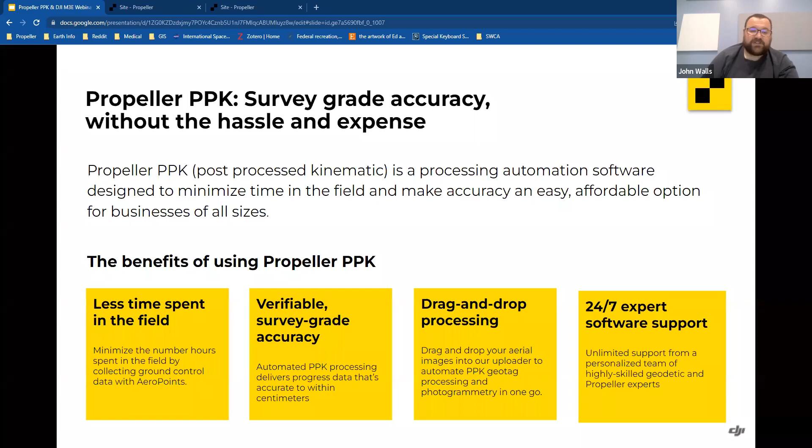So we've discussed at length the Propeller platform and how we help our customers, but really most of you did turn up to hear about the new UAV from DJI. So the Mavic 3 Enterprise is the latest survey-grade drone that Propeller is proud to partner with DJI on to deliver that PPK drone surveying solution. This drone is perfect for smaller earth-moving projects all the way up to a couple hundred acres due to the increased efficiency in the battery life and updated camera settings.

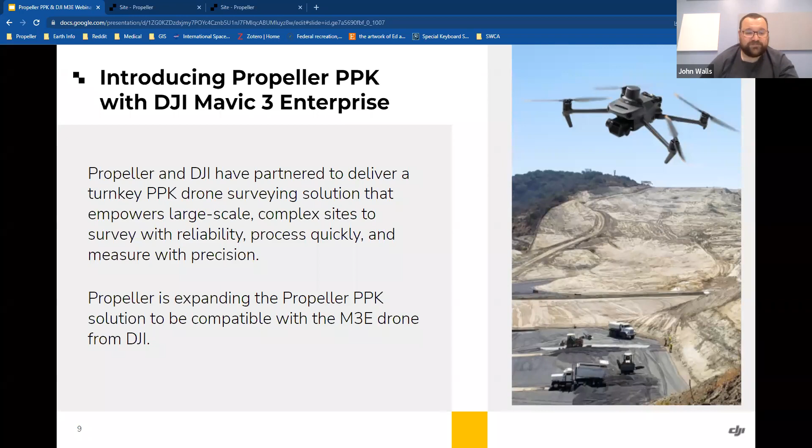Simba is going to dive into those updates in just a moment, but after multiple tests by our exceptional hardware and data success teams, Propeller is confident the results of the flights with this UAV will match those by the other DJI drones supported by Propeller, which is the M300, the Matrice 300, and the Phantom 4 RTK model. So if you're exploring options to integrate drone surveying into your workflow or update existing hardware in your fleet, the benefits of transitioning to the Mavic 3 Enterprise are exceptional.

Survey time is expanded with increased battery life, larger sensor, and faster photo capture time. Easily cover 100 acres or more in ideal conditions without sacrificing accuracy along the way. Pairing this drone with the AeroPoints and that PPK workflow simplifies the survey process and still provides 3 centimeters or better accuracy in far less time than using traditional survey methods.

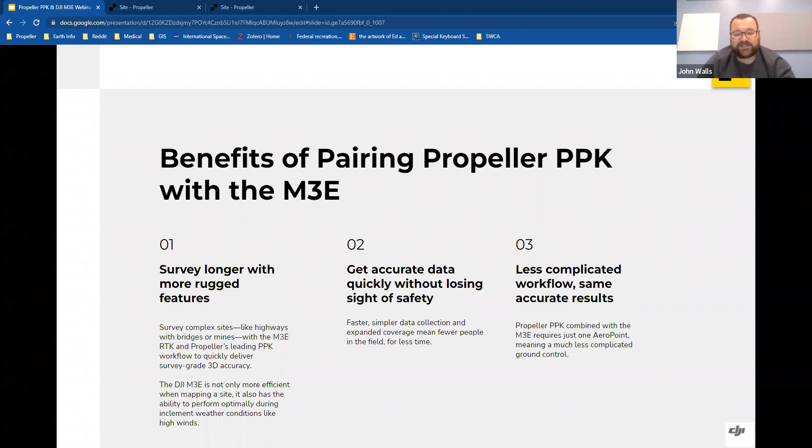So this is Simba from DJI. I just want to give you guys a quick intro on myself. I'm managing DJI overseas geospatial channels and solutions. You all know that hardware is key for the DJI Enterprise team, and we're glad that this time we brought DJI Mavic 3 Enterprise, our latest flagship small size drone, to the industries, which can help boost efficiency to the next level. Next slide, please.

So before I dive into the Mavic 3 Enterprise, I want to give you a brief hierarchy of the DJI geospatial business and how we structure our products into different portfolios. We have Mavic 3 Enterprise as our small size and portable mapping solution. It's an upgrade compared to what we had in the past, which is the Phantom 4 RTK. We also have a higher end optical camera system, the DJI M300 RTK plus the P1 camera, which is a full frame 45 megapixel camera. And we have our LiDAR solution, which is DJI L1.

If customers are looking for contour lines and areas with vegetation coverage, the L1 could be a great product for it. Other than the traditional optical sensor and LiDAR, we also have our multispectral product, Phantom 4 Multispectral, and in the future we're going to have our latest flagship small size multispectral enterprise product coming soon. So this is how we structure DJI hardware to meet the different needs of different layers of customers across efficiency and industries.

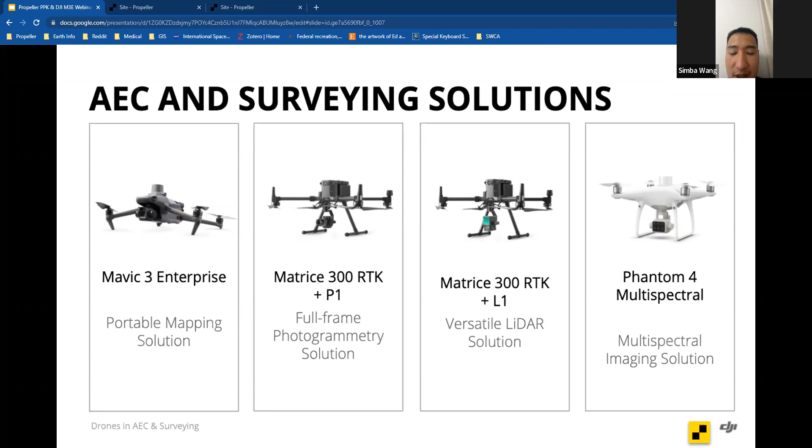Let's dive into Mavic 3 Enterprise in more detail. This is our latest flagship DJI Enterprise small size high precision drone. Compared with the Phantom 4 RTK, the RTK module can be detached and simply put back on, which increases the capabilities for different types of applications. For high precision mapping, you can use the RTK module. For general search and rescue missions, you can put on the speaker and spotlight; those are modules you can switch for different purposes and applications. A 1-inch sensor combined with 0.7 seconds per image increases efficiency to the next level. Compared with the Phantom 4 RTK, we're talking about at least 50% more efficient.

It's also equipped with DJI's latest transmission technology, OcuSync 3, which enables a maximum data transmission range of over 15 kilometers, and higher flight speed. One of the accessories is the D-RTK 2.0. When you don't have network RTK coverage, you can always rely on our base stations to communicate with the drones and remote controllers.

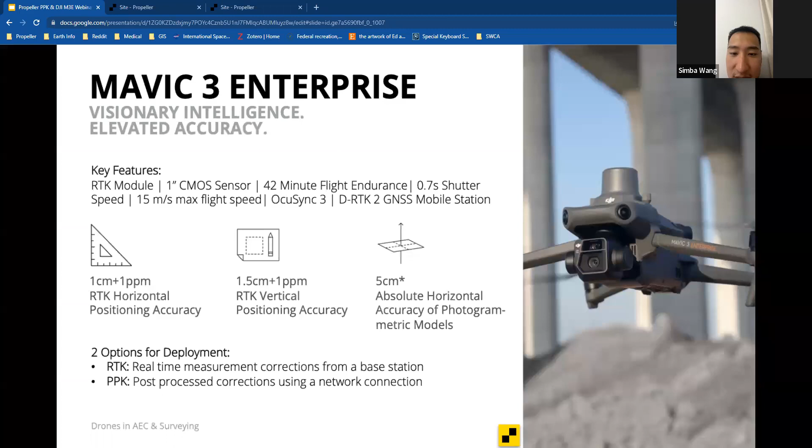Those are some cases that will be super helpful and suitable for the Mavic 3 Enterprise. This is one of the drones for BIM applications, one of our older products. Using drones saved time and reduced cost to a different level. If you scan the QR code, you can read the full article on how the drone helps the industries save time and increase efficiency. Just scan the QR code and you will get the full story.

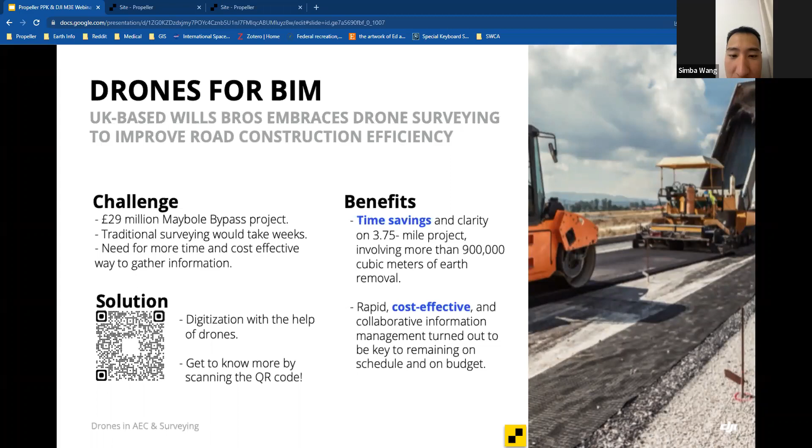Next page, please. This is another case for heritage modeling. We all know that in Japan, China and some other countries, we have a lot of ancient buildings. Sometimes we need to digitize them and model all the buildings for future protection purposes.

So this case actually happened in Japan. We processed it, we collected data, and we delivered 3D models by using our small size drone. And this one was actually achieved by the Phantom 4 RTK. But again, in the future, that will be the Mavic Enterprise.

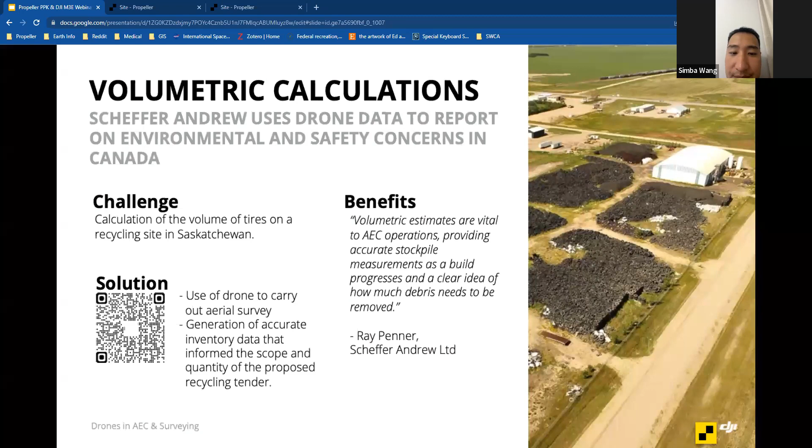And modeling and mapping are going to be really common features and requirements for geospatial products, right? We have buildings, we have roads, we have towers that want to be 3D reconstructed. It's similar, I would say, to applications like heritage modeling, but with different purposes.

But once we have those models, we're able to tag them and add metadata, and make sure that we can manage all the 3D models, and we can place all the 3D models into GIS platforms and understand all the XYZs. That will definitely help decision makers make decisions and have a deeper and more accurate analysis report.

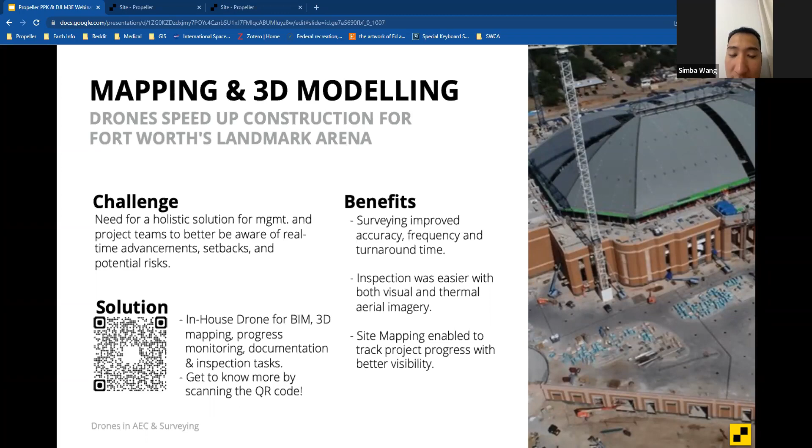Yeah, and also AEC and construction are key, right? So not only stockpile analysis, but also when we are building actual buildings and stadiums, progress monitoring is also important. So we can use drones to go to the job site and fly the area periodically. And we can reconstruct the 3D models for different purposes to do progress management.

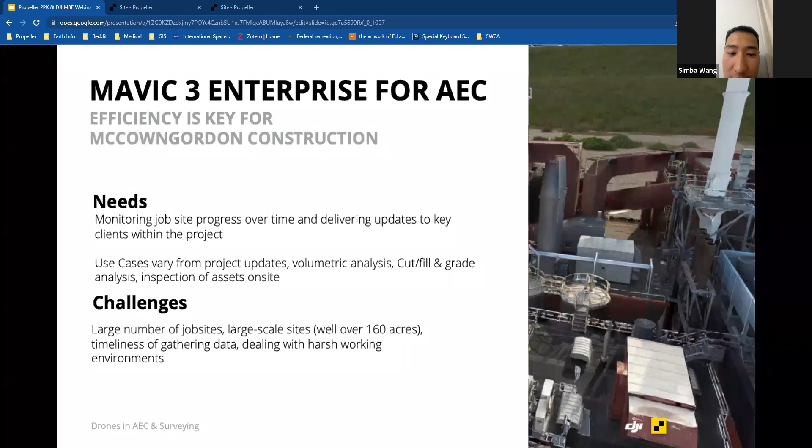And also we can add metadata. For example, once we have the 3D models and we can see this area needs to be fixed and that area needs some other details, we can simply add the metadata into the 3D models and save it, as customers' digital resources for future purposes.

So those are all, I would say, the suitable cases for the Mavic Enterprise in the geospatial sector, compared with our previous generation of high precision small size drones like the Phantom 4 RTK, and its advantages. And also trying to give you the broader picture of how DJI geospatial products are leveled into different missions, different projects and different budgets, from LiDAR, multispectral, and small size optical cameras. We offer them all, just trying to give customers the best choice they can select.

Thank you. I'm going to hand back over to the Propeller side. Great, Simba. Thanks so much for that breakdown.

Yeah, so some of the great things that we talked about with that new Mavic 3. If anybody's familiar with the Phantom 4 RTK drone, or if you're doing any drone surveying with that type of equipment, some of the big improvements with that drone are the increased battery life and the larger sensor on the Mavic 3. So we're going from a 1-inch camera sensor to a 4/3-inch, and then the shutter speed that Simba talked about goes from a 2.5-second capture rate to a 0.7-second capture rate.

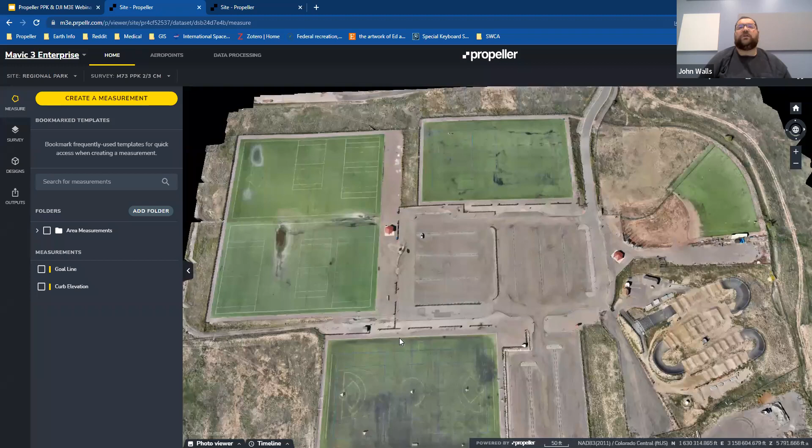All right. So this is one of the regional parks here in Denver. Pretty good sized park. So you can see several different soccer fields or lacrosse fields, parking lots that we've flown several different times. And this is one of our testing grounds. So really good accuracy, really great precision, and then high quality ortho imagery. And depending on the resolution of your screen, this may be really obvious to you, but I do like that the clarity of the photos is fantastic.

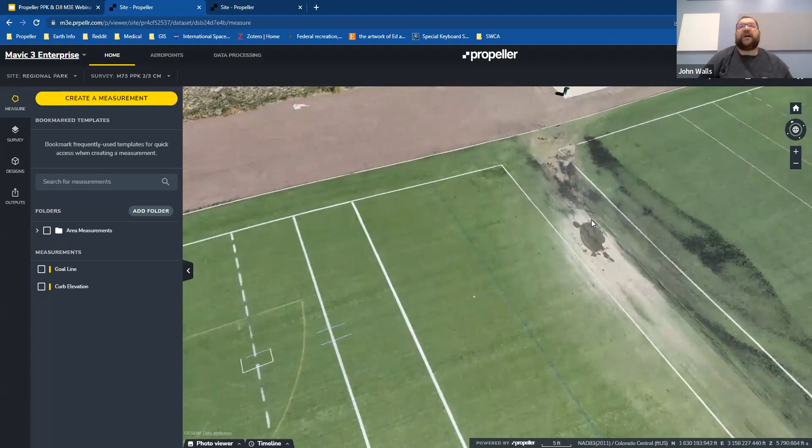And then being able to use the platform, it's really easy to drag and drop any design files into the platform. So if you're doing any comparison between an existing ground file or a finished grade model, you're able to quickly make calculations in here. And I did a couple of quick calculations before we started, and that's this curb elevation.

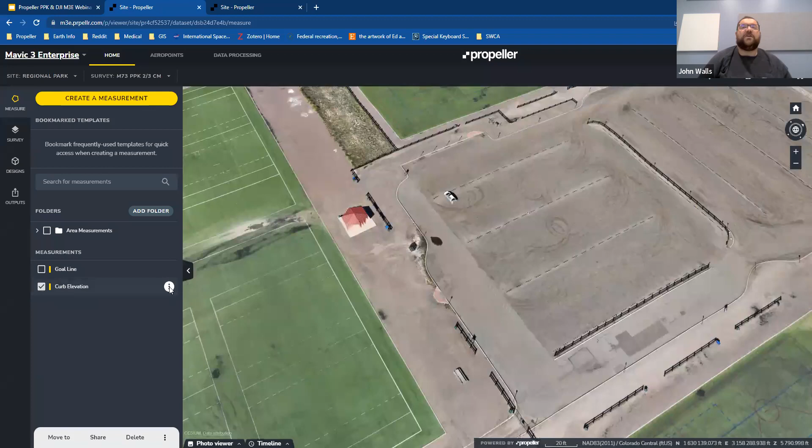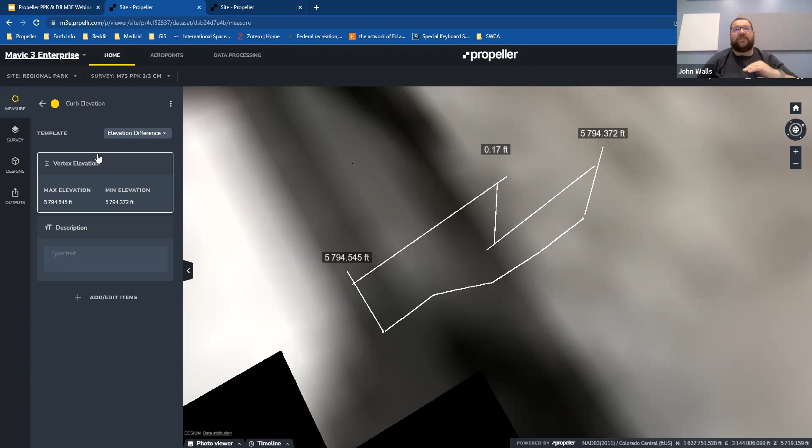So it does kind of give you an idea of the level of accuracy that we get. So this is just a quick measurement of the height of this curb. And that's going to be right here, and it's going to show you that elevation right there. So you see the top of a curb to the ground below it, and you're looking at a tenth of a foot, so just a few inches, and we're able to get that calculation right there. So that gives you that level of detail on the z-axis. It lets you know exactly how accurate that survey is.

And then finally, I did want to go over to a goal line. So if you're familiar with the dimensions of a lacrosse field, the goal line should be about 6 feet in length when you set up the net for lacrosse. And so you see there's already a couple set up, but this is a goal line here. And so I did a quick measurement on that, and we're right at 6.01 feet. So you can see that the measurement of this area is incredibly accurate.

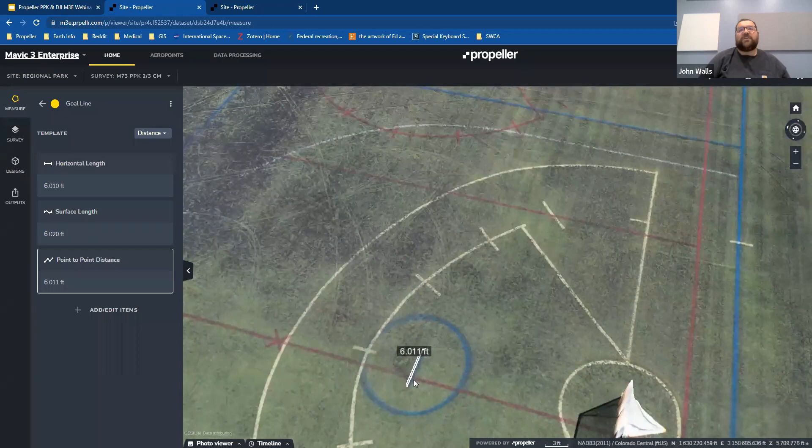So if you're doing any sort of calculation with as-builts or checking your site for any measurements, whether that's volumetric or distance or areas, you're going to be very confident in the accuracy of that data on the platform. So I just want to show this to you. This is one of our M3E data sets that we use for testing, which is a really great result. So I'm really impressed with the Mavic 3.

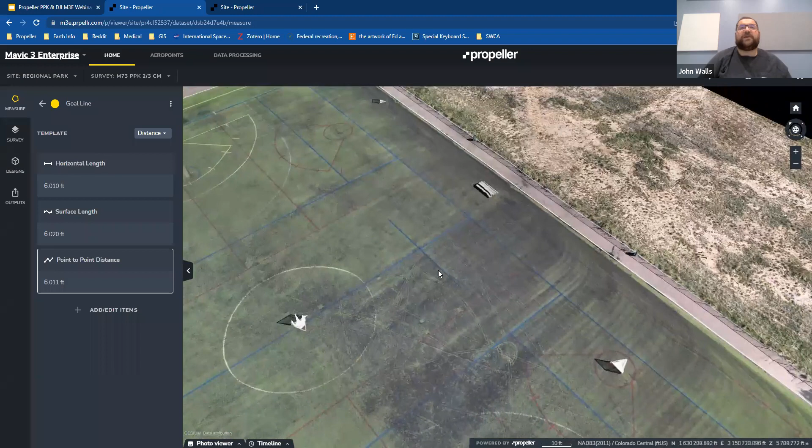Again, I would also think that with how fast this drone was flying, you could potentially see motion blur or any sort of warping affect the accuracy or throw errors in the photogrammetric processes. But we didn't have those issues at all. And so it does a really good job in stitching those photos together and getting you those results.

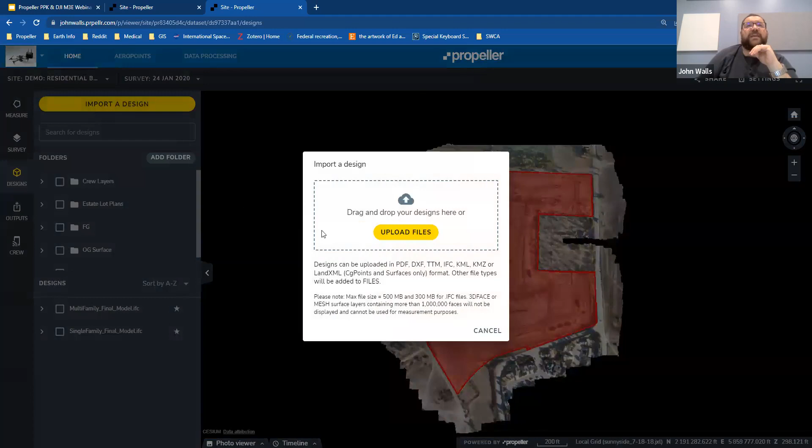And so one of the last things I wanted to show is actually some of those calculations. So this is a residential build. And so one of the things I did mention was dragging and dropping those designs in. So if you're dragging in a finished grade design for this residential site, we ingest various types of files from a DXF to a TTM or a LandXML file. And then you can use those design files as a basis for those measurements.

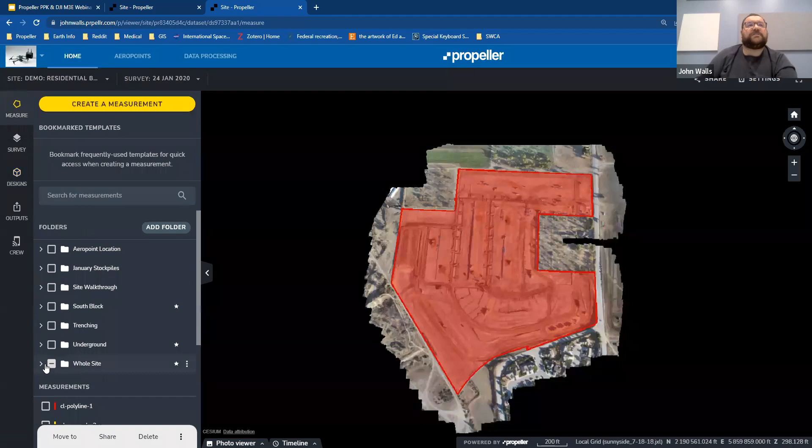And so here, we're tracking how much material has been moved between surveys. So if you're doing any progress or quantity checking between surveys, we're checking the January 24th flight against the December 18th flight. We get that heat map over here on the right. It's going to give you the location of the work that's being done. And you can use the mouse here on the platform as a check shot to see how much material has been moved between surveys. And then you get the volumetrics over here on the left side.

And then finally, like I said, mentioning bringing in those design comparisons, you can also compare it against that finished grade design. So you're then able to track how much material you have left to move before you hit the end of your design. So how close are you to being balanced? So if you know you're moving an approximate amount of material on a biweekly basis, are you on schedule to hit the end of that project? So when you're bringing in different contractors for concrete or moving into vertical, you can start to assess the progress of your work over time.

So this is the information that our platform can provide. And one of the other really big benefits that I kind of skipped over, but I do want to come back and reference, is the ability to process and localize coordinates. So the AEC industry typically uses localized calibration instead of published state plane or UTM coordinates. And so this site here specifically has a JXL file, which is a localized calibration. That's how we're able to incorporate those design files in from a CAD program.

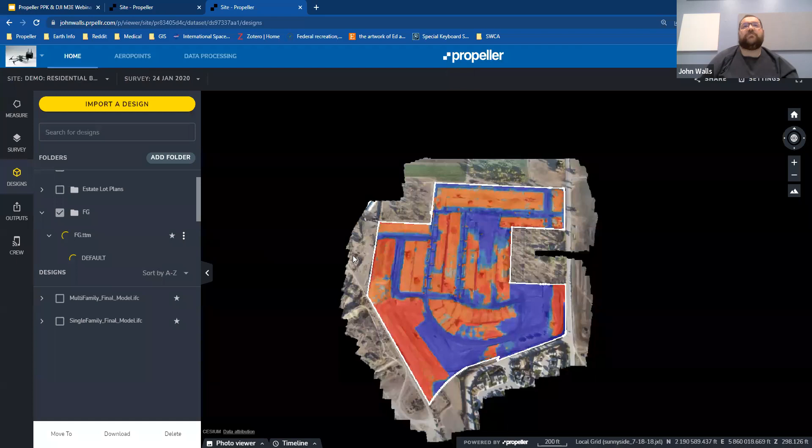So from Civil 3D or AutoCAD or any other CAD program, you can bring in those design files, and that's how we're able to get those measurements. And so that's one of the big differentiators between Propeller and many other analytics and processing softwares, that we're able to process in those localized calibrations. So there's no need for the analyst or a CAD technician to export survey data from processing software and then georeference it back to the localized coordinate system. You're able to do that all within that platform.

So I just wanted to share that real quick and let everybody see a couple of the really big powerful tools with the Propeller platform. I think with that, I just want to throw that out there.

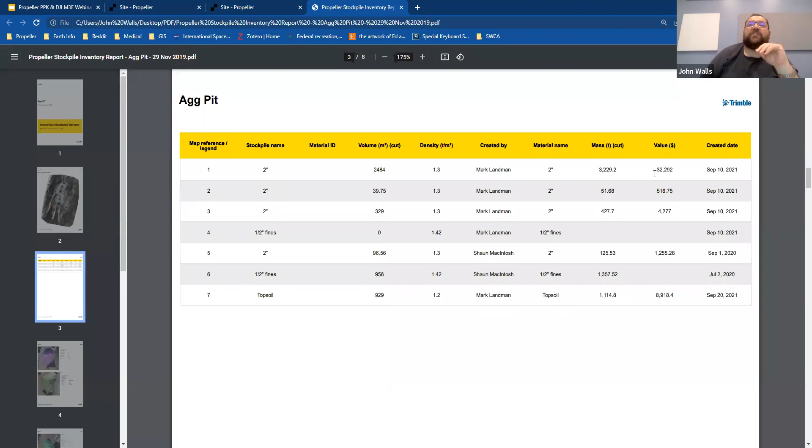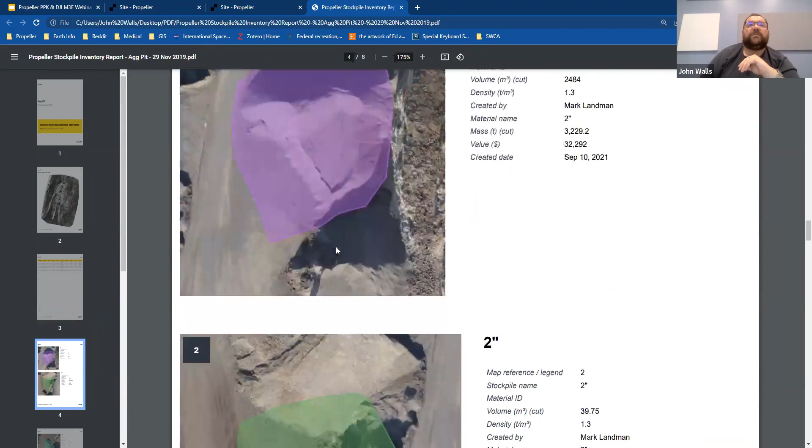And so that's your first page, and then your second page is going to be a stockpile by stockpile review. So you can see the pile that was calculated with each inventory broken down there. And then the last page is going to be the actual material total. So if you've got 5 or 6 piles of 2-inch, 2 or 3 piles of 1/2-inch, and then a topsoil pile, it's gonna consolidate those into one single report. So that's what the stockpile report looks like.

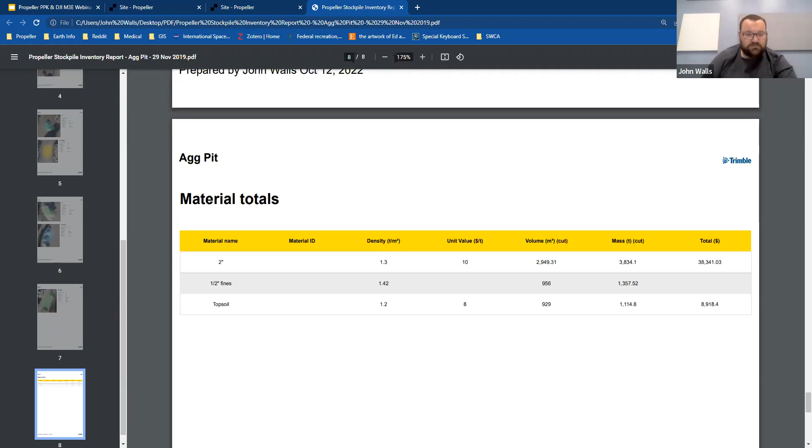A cut fill map. I can see if I can have one of those actually pulled up. So if you want to pause that share real quick. So I have one pulled up. Yeah, here we go. Okay. Yep.

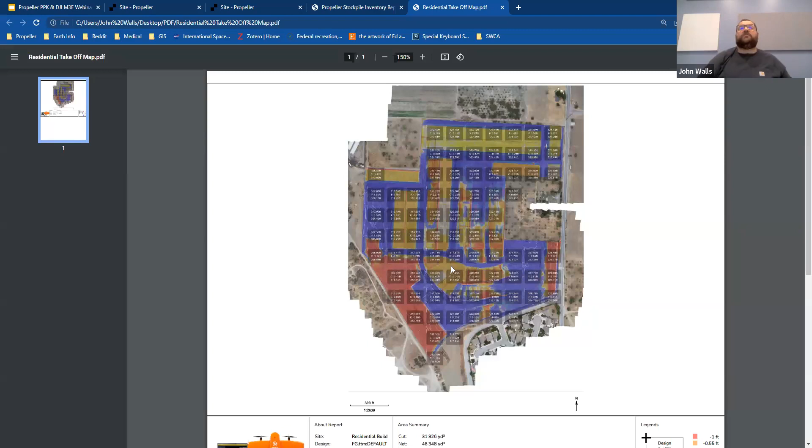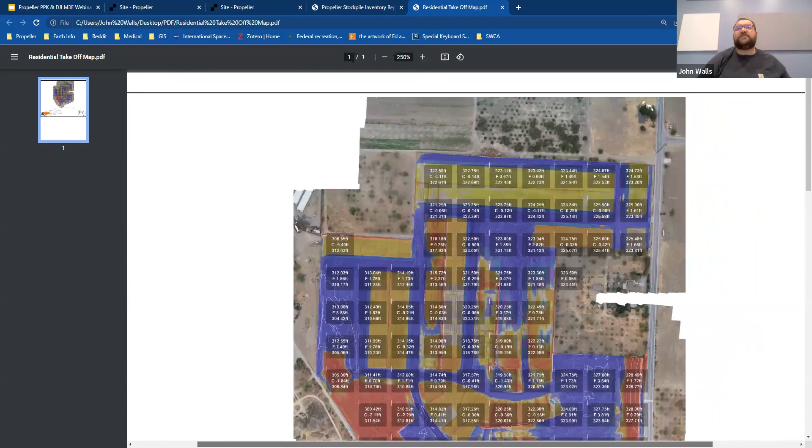All right, so this is what a takeoff map looks like. So what we've done is we've set a grid on that residential site, and then we've incorporated the cut fill calculation towards that finished grade model. And so if we zoom in a little bit more, you can see it gives you a breakdown of the grid of what the cut fill number is per, I think this was a 100-foot grid that we set up.

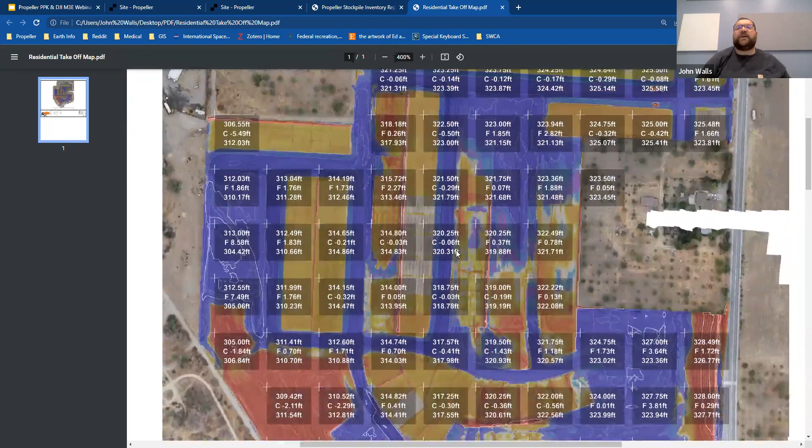So it gives you the top surface, the cut number towards that finished grade surface. So it breaks that down for you that way, gives you contour files below it, and then it will give you a volumetric calculation over here on the bottom.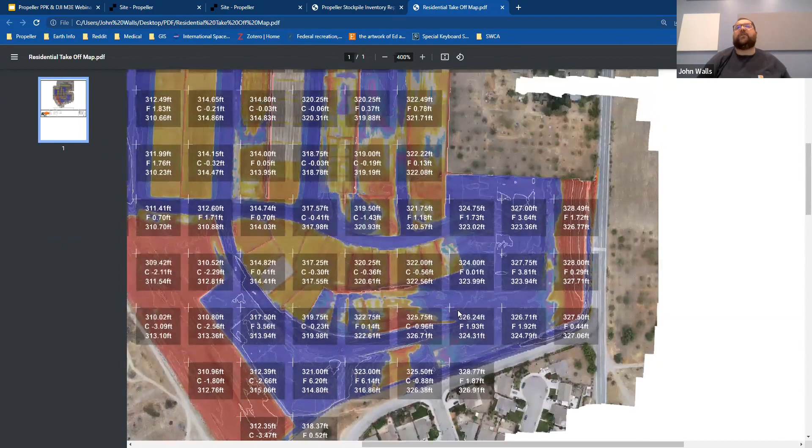So you see, we can see up here the visual reference, and then it gives you the map down here at the bottom. So we're still looking at about 110,000 cubic yards of total removal that needs to be taken care of. So that's a couple types of reports that we're able to bring out for you there. Amazing. All right. So a lot of people also still have the P4RTK.

What is the expected accuracy of the M3 versus the P4RTK? What is the expected GSD? So the GSD is dependent on how high you fly, but you're not going to see any difference between the two. So that's just depending on your elevation. So if you're flying the P4R at 325 versus the M3 at 325, it should be the same GSD. Amazing.